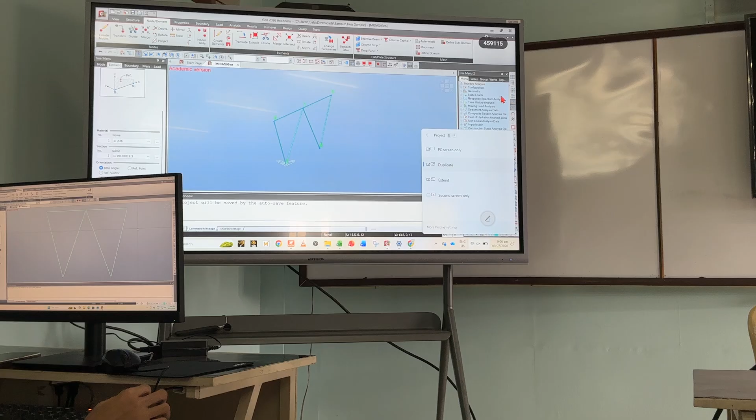Okay, so for those who finished, you can continue. Check your local axis. Go to display, then element, local axis. Click OK.

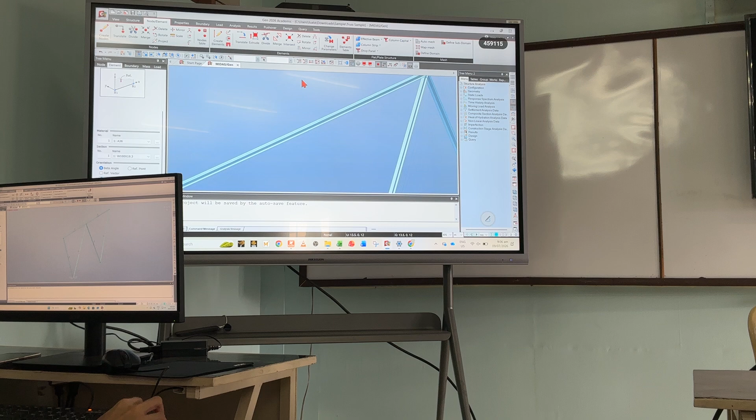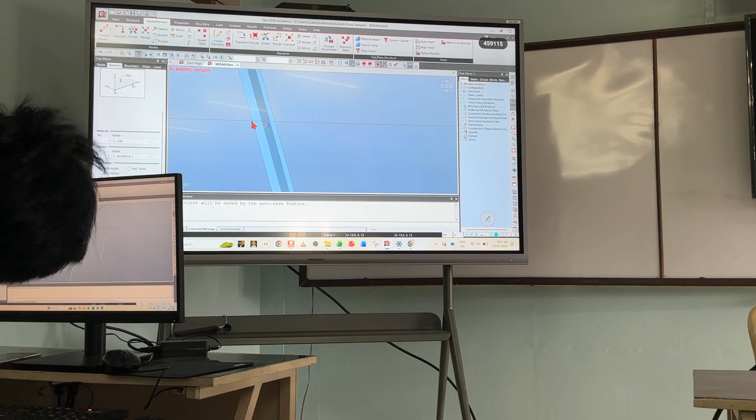So the X axis will always be parallel to the member. The Y axis will be perpendicular, and the Y axis refers to the section such that if you apply bending, the bending will be about the strong axis. For example, here is the Y. So if you bend this W section, it's the strong axis, while for Z, it's the weak axis. And this should be consistent with all members.

So please verify. Okay? If verified, the next part will be your support. So in the example, what do we have? Pin support, both this joint and this joint.

So go to the boundary, highlight the nodes, click support, then click this one. For pin situation, click apply. Okay.

Now before proceeding to loads, go to structure, then structure type, XZ plane analysis, and 2D also, then click OK.

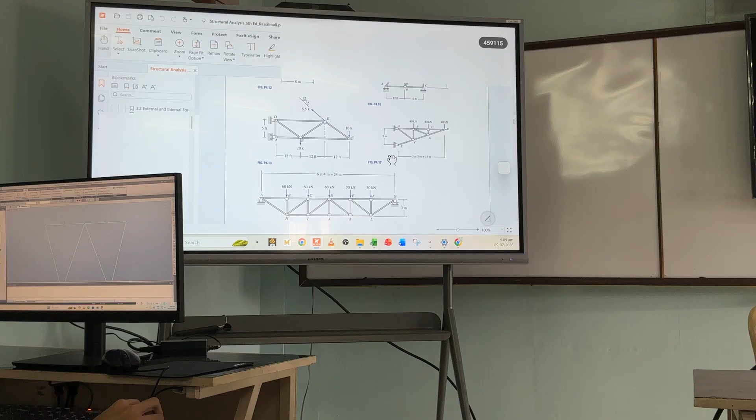That's it. Now apply some loads. Applying loads is the same as in the beam discussion I gave earlier. Not nodal. Okay? So try to apply the load as given.

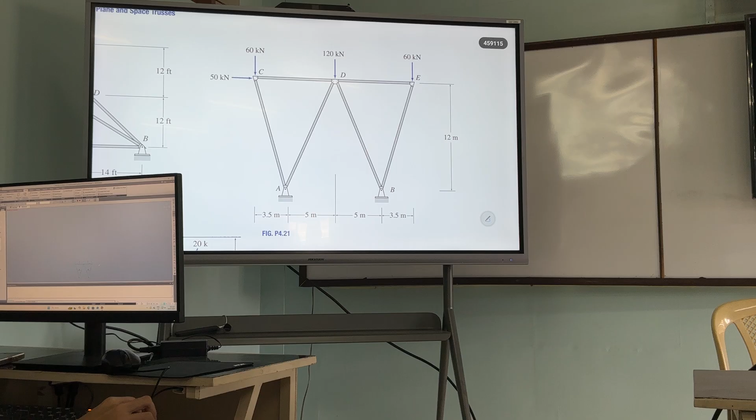Okay, so please analyze and then check the results if they're as expected, and check the reactions. Then the wide flange section.

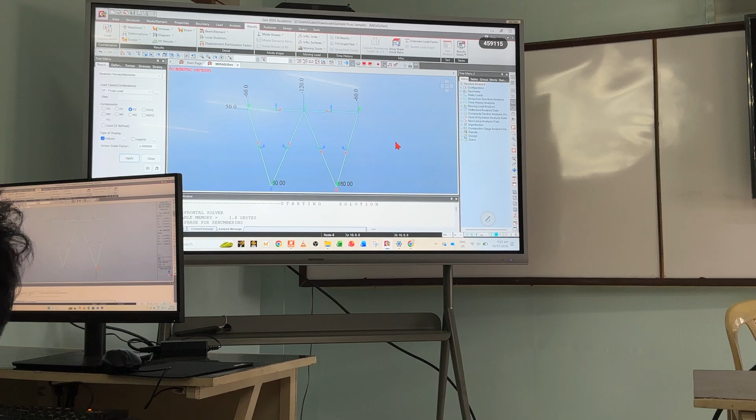Next, forces. Now, since I'm dealing with truss here, click to trace the forces, then truss forces. Contour values. Output will be all. Then click apply. There's no result.

If there's no result, it's because my member is a beam type element. Let's go to beam moment forces instead. That's axial Fx. Click all. Click apply.

Or just absolute max. Apply. So these are my loads, or forces, on each member. So negative is... let's click this one.

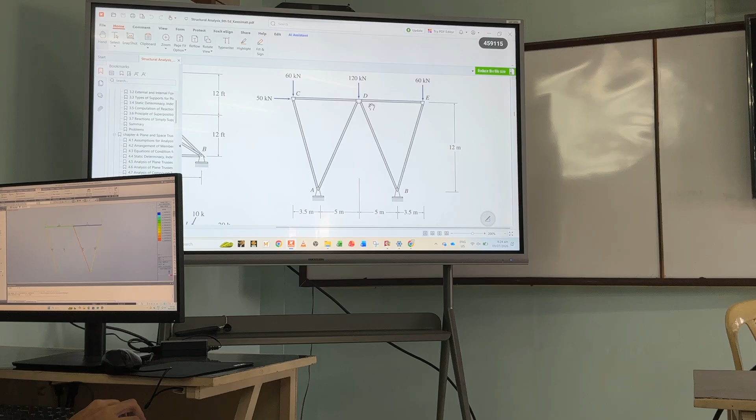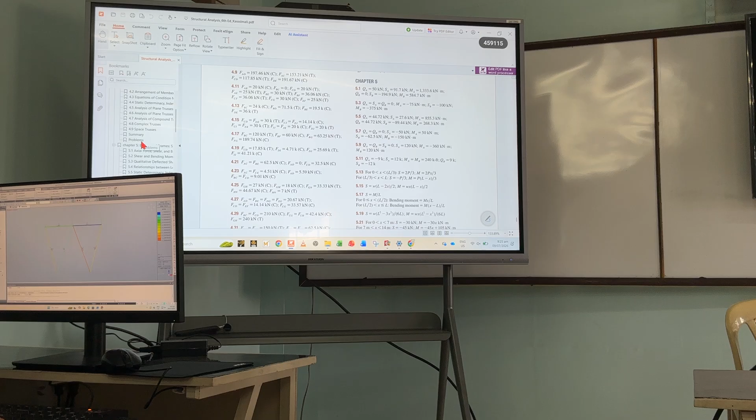Verify this. This is problem 4.21. 62.5 compression, CAC. AC is compression 62.5. So negative is for compression, positive for tension.

Okay? So for this analysis, the results matched between the manual and the software calculation. Okay? So this is for axial, this is for shear, zero. And then for moment, take note of that. For moment, there is a small value.

Now, when we go to display truss forces, nothing appeared, meaning the elements are considered to be a beam type. So how about we change this one into a truss type element?

So highlight it, go to node element, then change parameters. Click element type from general beam to truss. Click apply.

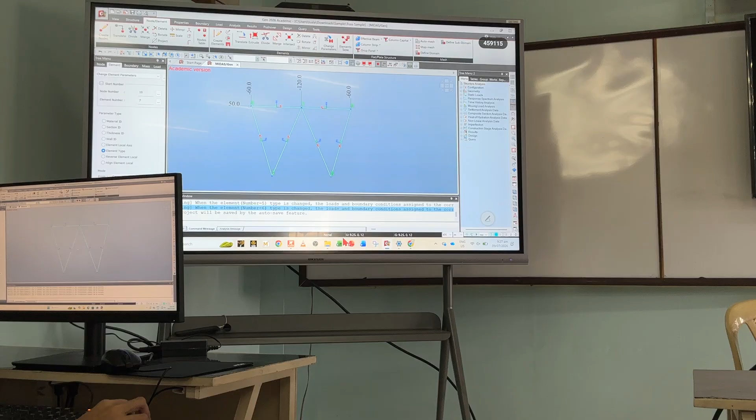You can see the warnings. For this warning, it says loads and boundary conditions assigned to the corresponding element will be deleted. For truss, you can only assign loads at its ends. If you assign a uniform load, same as with beam, it will be deleted if you change to truss. But how about the results? There might be a difference. So let's perform the analysis, no errors.

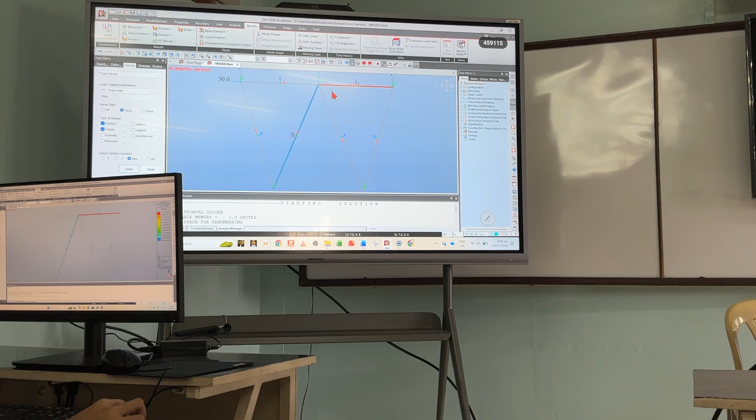Let's go to results, forces, or reactions. Reactions Fx, same. Fz, same too. How about beam moment forces? Fx is no longer in the results since it's now a truss element. So we'll go to forces, truss forces, all, click apply. Let's have it as max. The actual result is still the same. To know what are the tension forces, click tension, click apply. So positive is tension, negative is compression.

Let's continue now with the design. Here we are dealing with steel material, like steel section. So let's go to design. Under steel design, drop down, click design code, change it to NSCP, CV 2015 LRFD.

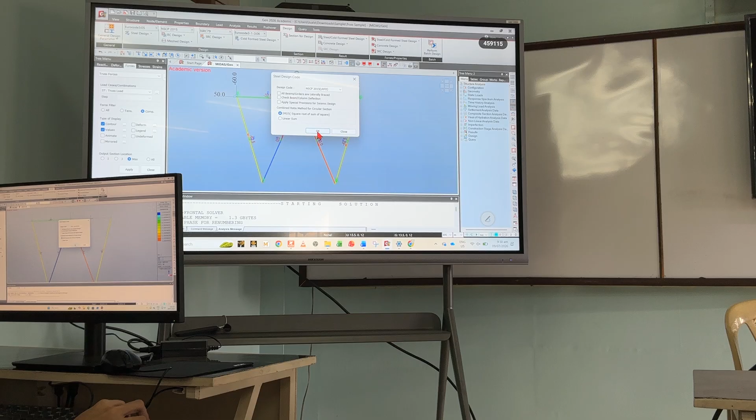I don't have a column, so there's no member to check for deflections. This one is for earthquake, just have it as is since you can't check it. Click OK. For the zone strength reduction factors, update by code, then click OK.

For modify steel material, if user defined, you can change the Fy yourself by specifying it. But in this case, we won't touch it, so leave it as is.

For the serviceability, as mentioned, there's no column. So select all for serviceability.

Before we go to the design, let's check how the deformation looks. So we go to results, deformation, deform contour. Let's have it as resultant, of X and Z. Click deform, then click on that. We'll change the unit to mm. Let's get the joint translational deformation. About 5mm, 4mm. It's small, and we can now proceed to the design.

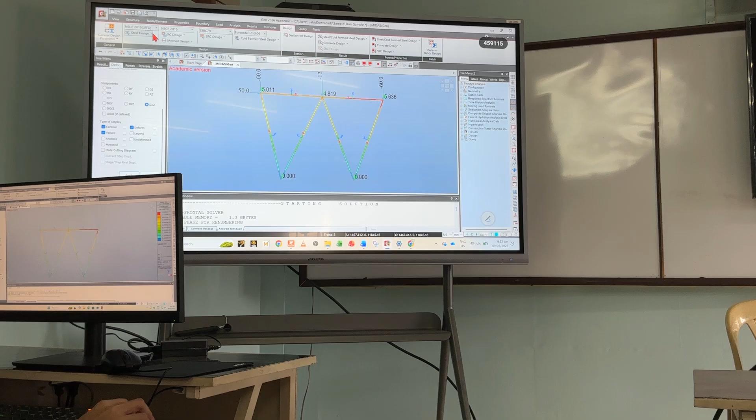For the case of steel design, let's check the section here. What we're doing here is to check if the specified member or section is sufficient for the given loads and the resulting stresses. So let's do the steel code check.

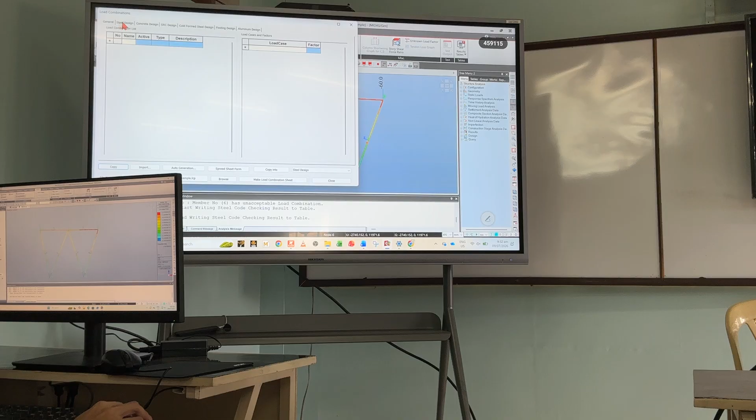Sorry, there's no load combination yet. Go to results, then click load combination. Under steel design, auto generate. We'll have it as is. There's no reduction for live load, no earthquake, so it's just based on our loads. Then load combination, click OK.

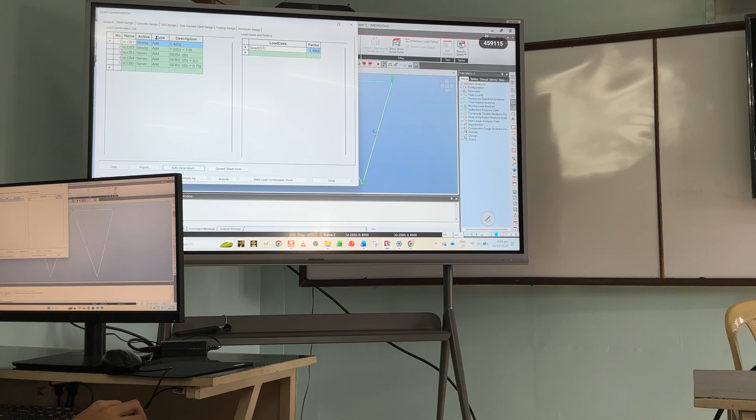We can now perform the analysis. No warnings or errors. Then we'll check the load combination if it can be generated. Okay, it's there now. There's no 1.6L, but there's 1.4D. We want it complete, so there's already a load combination. Then we can proceed to design, steel design, then steel code check.

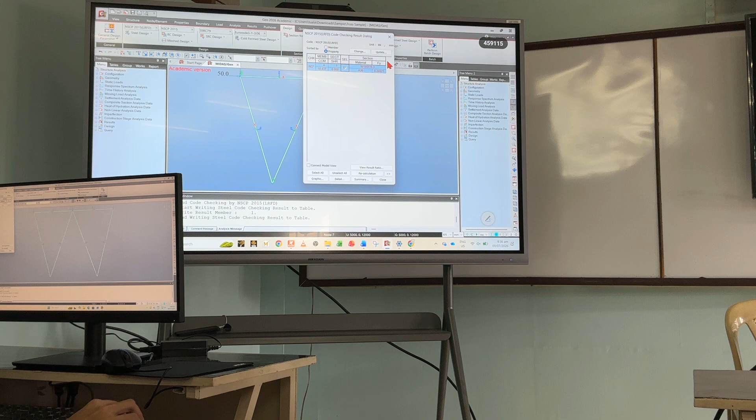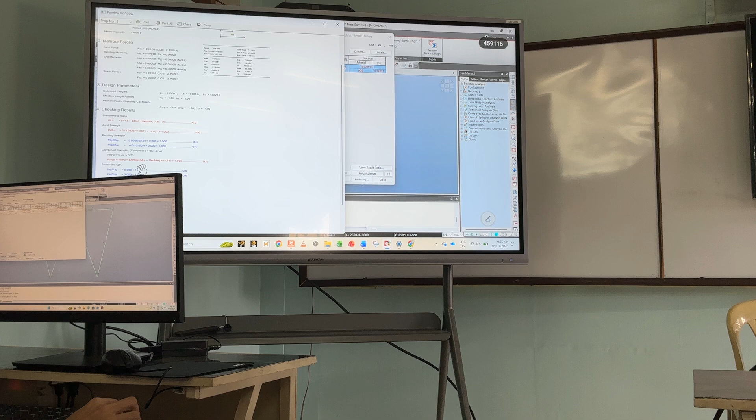Per property, this yields the most critical result. Let's look at the result of the design. Slenderness ratio for tension does not comply. Then the actual load is greater than the capacity. And combined flexure, anyway there's no flexure. The actual load to actual capacity ratio fails. So meaning for the current section, it cannot handle the given loads.

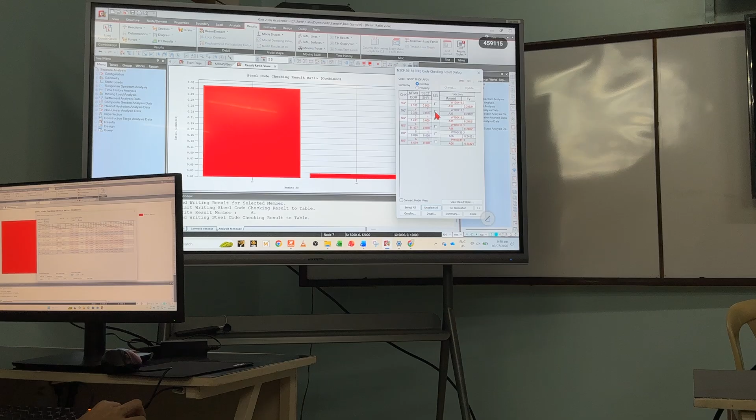Let's check the demand to capacity ratios for those members that pass the design. So the ones that passed here are your member 2, and member 5. So only these two members.

So if you view the DCR, view by member, select all, then ratio, combine, option, let's say line, show graph, meaning DCR for member 2 and 5. I think the vertical bar better represents the data.

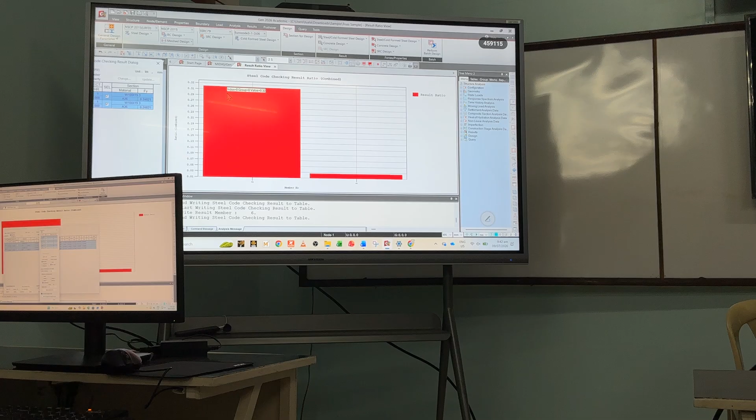So for the members that passed, for the same section, about 31% of the total strength was used at maximum. Okay? Any questions today?

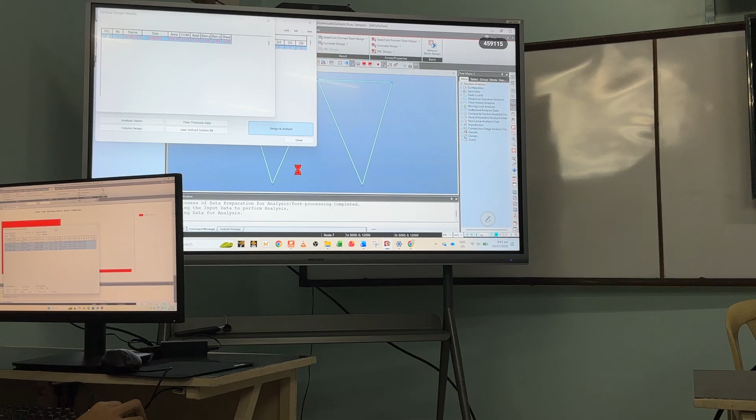So meaning for the other members that didn't pass, we need to choose another section. However, for the case of steel design, under steel design, we have steel optimal design. So click on that. Select all. Design and analysis. Draft report.

So, just repeat the process. Select, then check, number of iterations.

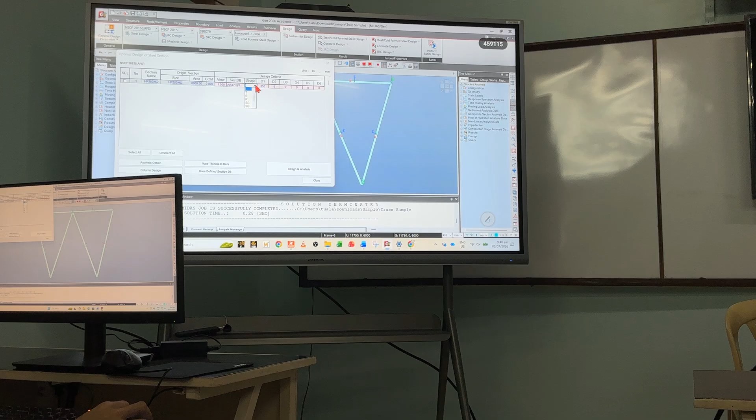So select all and then design analysis. So buwan niya for the members na wala nakapasa kay na, we have HP 250 by 62. So close. Kung kadto ko sa works.

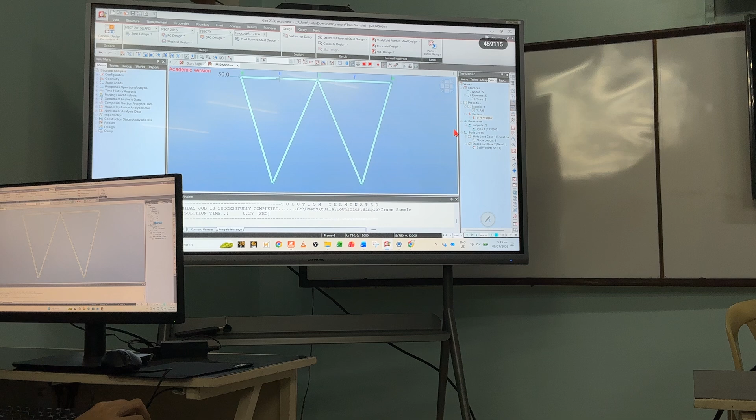Buwan niya gi-change naman ang members na kayo ng nakapasar. So if we go to steel design, then steel code design, per member, expand, then click OK.

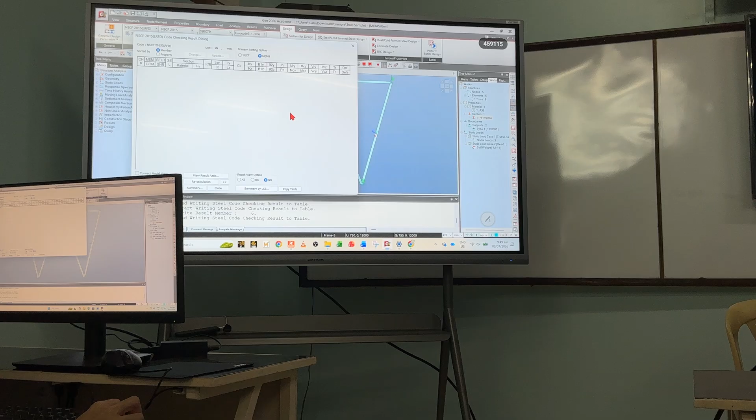Meaning tanan nga members pasado na. Kung click NG ang mga wala nakapasar, meaning tanan nakapasar. Then you can view kung ano ka efficient ang gin-suggest nga section against the loads. So buwan niya katulad sa view result ratio.

Then sort by member, select all. Code checking, all ratio will be combined, especially for axial cut flexure. Although wala man siya flexure kay truss. Then show graph result. Close ko lang.

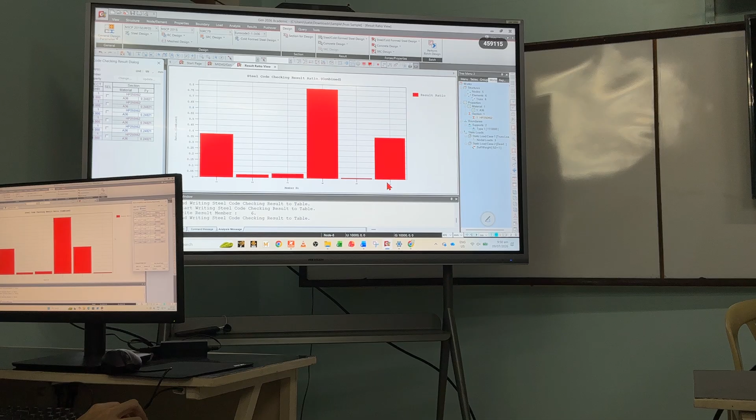Okay. So if you use ang design against, gamit mo ang design for the most critical section o two members ng critical, tanawin mo di wala kita take advantage ang amuni nga section for member number 5, 2, and 3.

Okay? Dason mga close to 50% ang na-utilize for member 1 and 6. And of course, ang fully utilized guild and most critical na member is member number 4 with the ratio closest to 1.

Okay? So later on sa mga design nyo, no, if you apply, let's say, in the case of reinforced concrete beams, isa lang ka section ng gin-ubra nyo, pina-apply nyo sa tanan, then di mo balaan nga, ay, pwede po kung reduce ang reinforcement sa mga member while retaining ang size of the beam. Okay.

For this case, no, even though hindi siya efficient for 3 of the members, kaso nga lang, kung i-change man ang na-assign na section, dira ka naman, for example, magka-problem sa procurement and then installation.

Kung different na section ang i-specify mo, you need to make sure and to check nga ang tsakto na section sa tsakto man na location. So sa procurement, duwa naman ka section ang need mo i-purchase instead of 1. So mo naman siya.

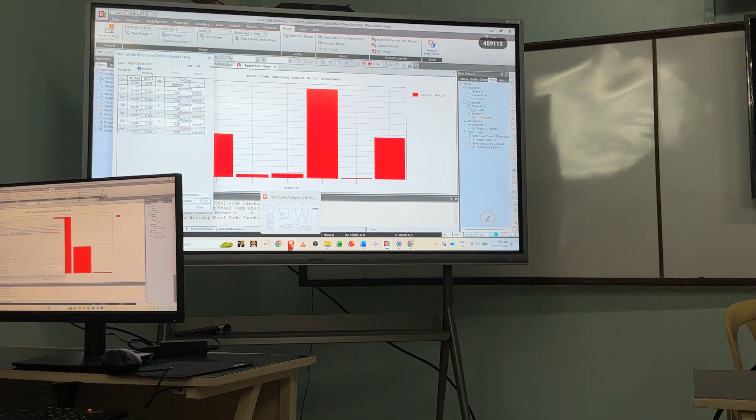Fabrication also, no? Let's say for this section you have a depth of 250. So sa isa to kay na 100 nakapasar. So paano siya karon i-lapping or i-connect ang 100 yung depth sa 250? Isa ka case na problem. Kung wala ka problema, naka-flash ka na ng member, so same section kayo. Unless na madugang ka sa thickness. Thickness ng smaller member, gano'n sa join, para mga takot.

And then another thing is aesthetics. Kung duwa di ka member gamay, aesthetically, not symmetrical, not uniform. So may effect siya. Okay?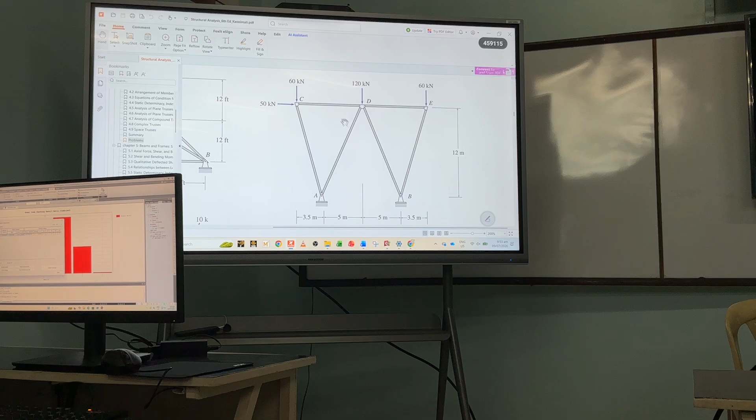Kung truss ka wizard, if we do ang truss na wizard, pilita lang kita na. So base structure, truss, let's say, namuni nga type ng members, namuni siya nga direction, o pwede mo naman.

Tapos namin ito. Number of panels, 1, 2, 3, 4, so 4. Length, on one side, let's say 6,000 mm. Change siya ng 1 meter, para mag-meter. Height, 2.4 meters.

So makita tayo ang show dimensions. Kung symmetrical then you will have this view. So, edit. Kung gusto mo nga may vertical member, insert verticals.

Okay. Then, diri maka-specify ka sa material properties ka section. Kung naka-check si apply the same material to all members, then for the top, or rather for the chords, top and bottom, magawa niya same section, same material. Okay.

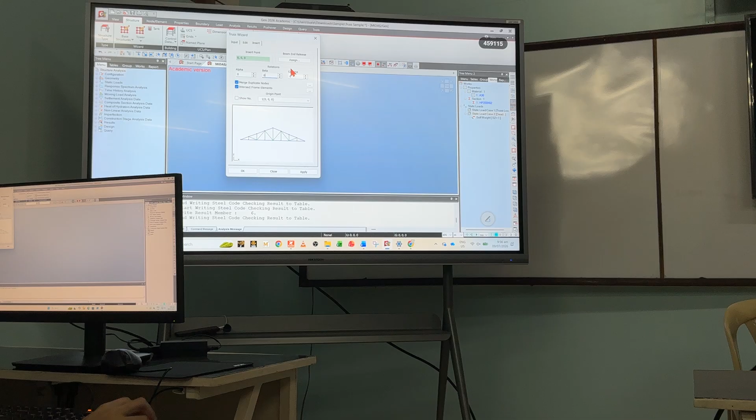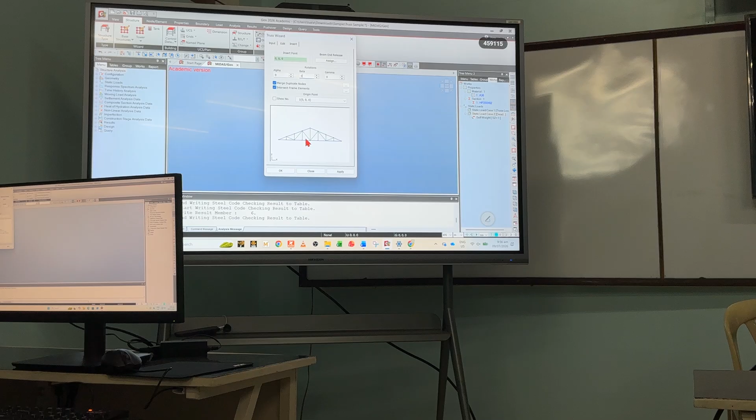Now, for this kind of truss, again, ang uniform load mo, pwede ka lang ka-apply is beam type ang inyong mga element. Okay, so buwa niya, uniform load, typically ga-apply na siya sa top and bottom chords. So need mo nga ang top mo is beam type as well as your bottom. But if you want to have ang members to just carry axial loads,

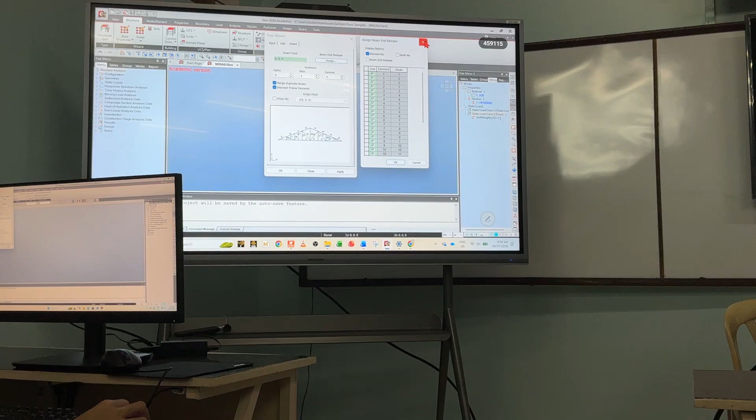i-release mo karon ang moment resistance so that it will change from a fixed or may rigidity to a zero, wherein na pin siya ng connection. Okay. So for now, we'll just have it as is, hindi na pag-release. Then click OK.

So check yung local axis. Y is, in this case, strong bending direction. X is along the length of the material. Okay.

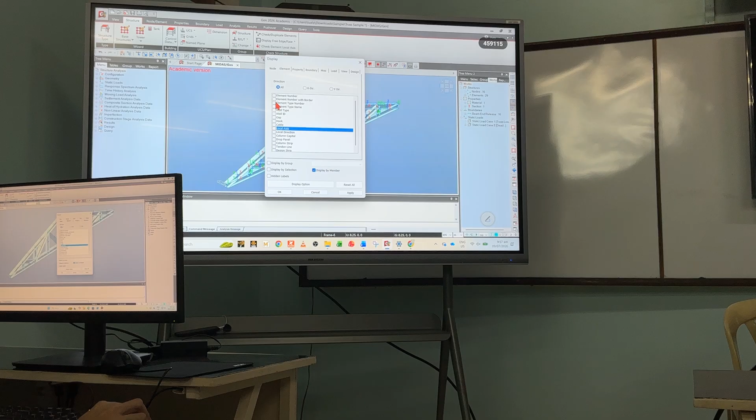If you want to check ang type of member, go to element, then element type member, sorry, element type, click OK. So, hindi makita na pili siya, truss siya.

And then, apply ang inyong supports, then apply yung load. Either nodal or uniform. On your top chord, brown na siya kay beam type. Okay? So that's it for truss.

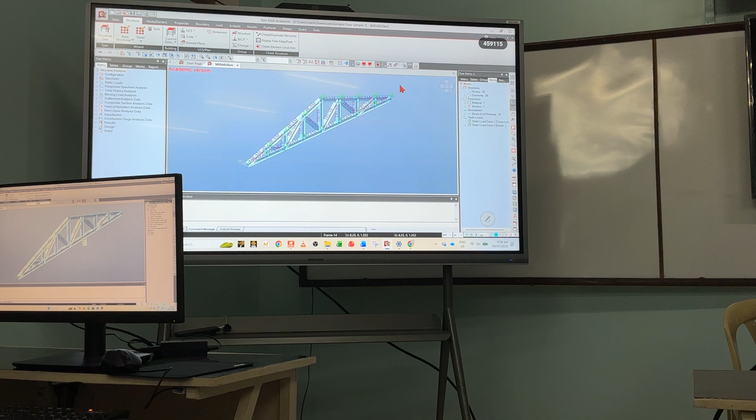Wala na question, pwede nakalakad. Kaya tayo. Kasi may klase ka. Close lang ang PC.